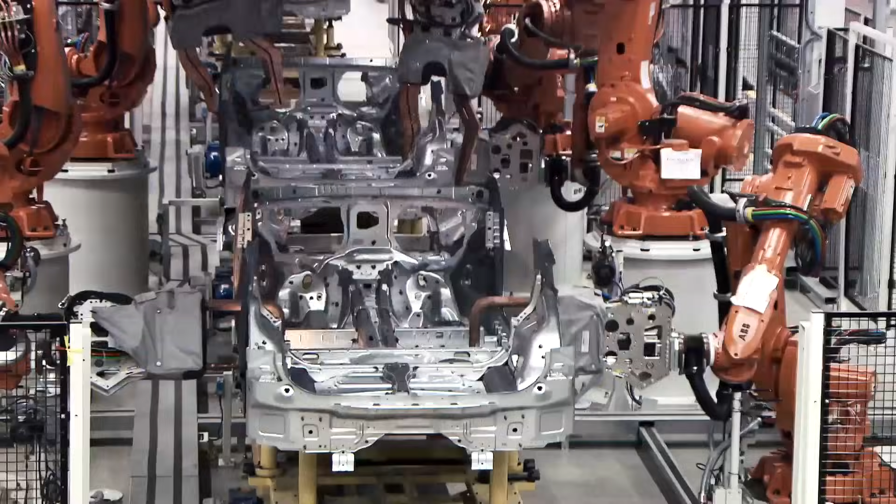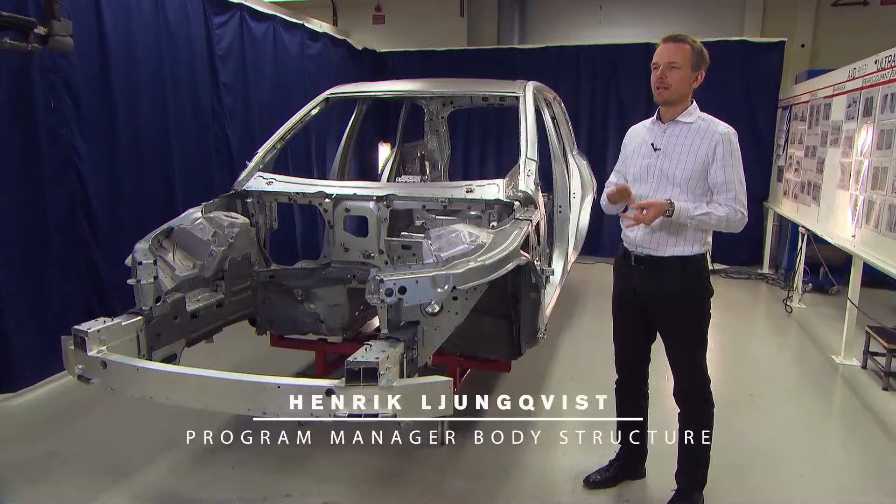This car body is developed to meet all requirements around the world. It's a worldwide car body, which means that it meets all legal requirements, all rating requirements and all internal requirements we have for safety.

To fulfill these requirements, we have divided the structure into two main parts. One is a deformable part of the structure, and then we have the safety cage, the backup structure of the car.

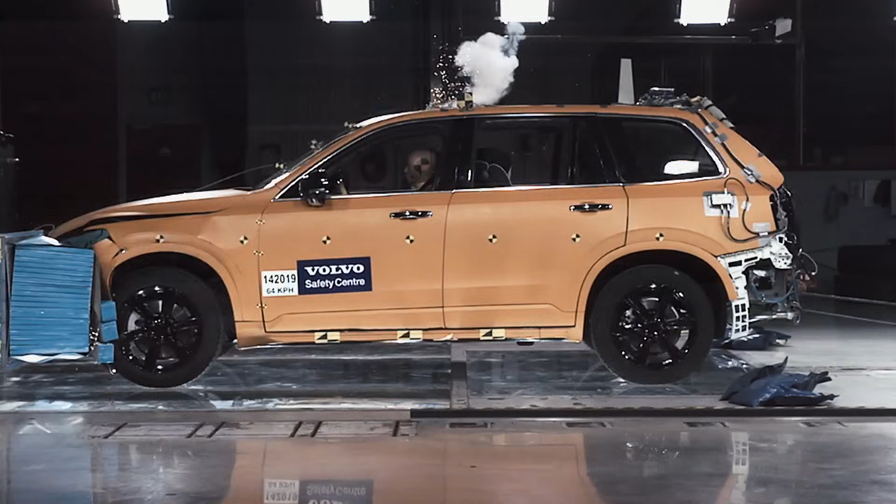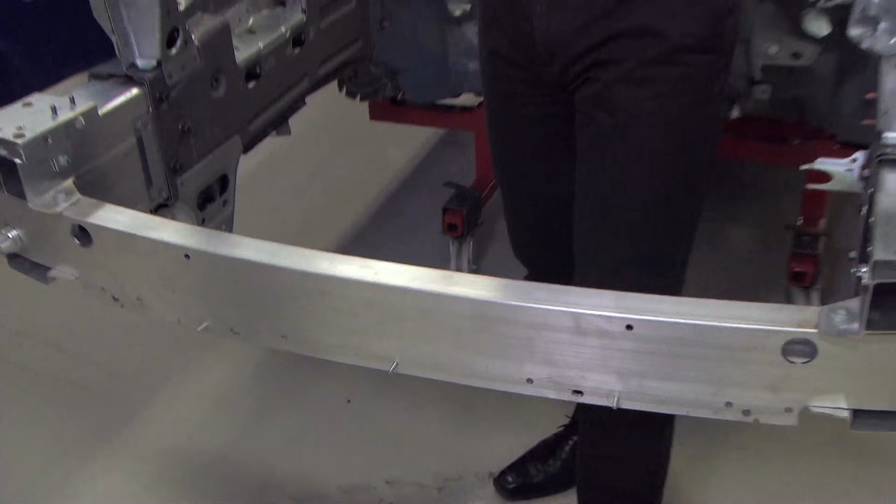First we have the bumper beam, which is this component in aluminum, and we have a wide bumper beam with a high section for spreading the forces during the crash event. After the bumper beam we have the crash box. And during the crash event, we have an actual crash of the crash box. After that sequence, we go into the side member itself. And then we have predefined bend lines in the side member, so we bend it like this.

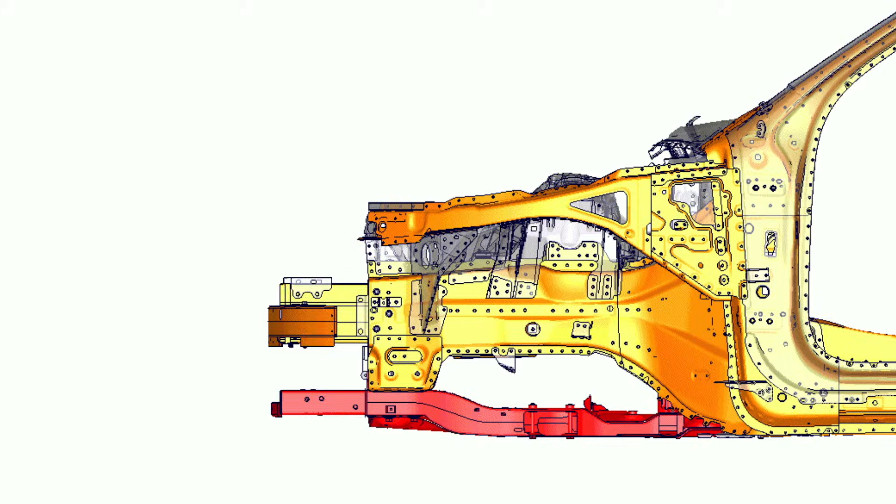During that bending of the side member, we drop the force and we drop the pulse and the deceleration for the occupants, which is so important to secure that we have not too high forces from the restraint system to the occupants. In parallel with this system, we have the upper side member you can see here. And that member will bend inboard during the crash event.

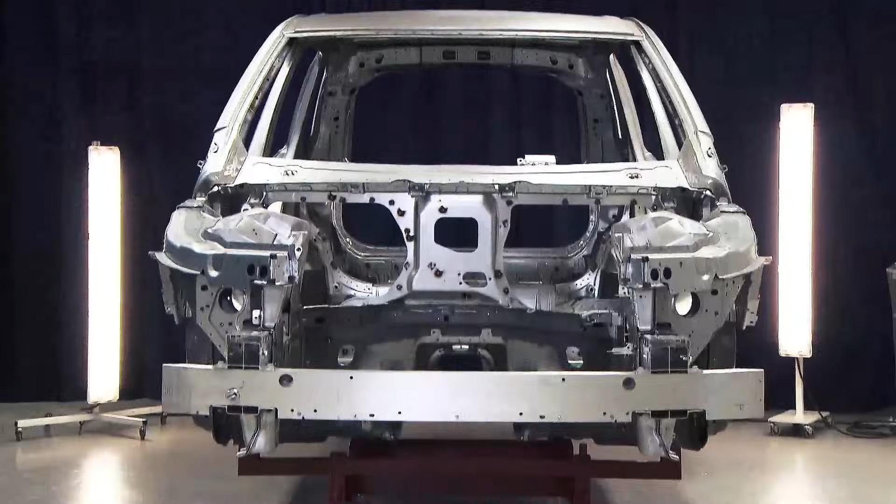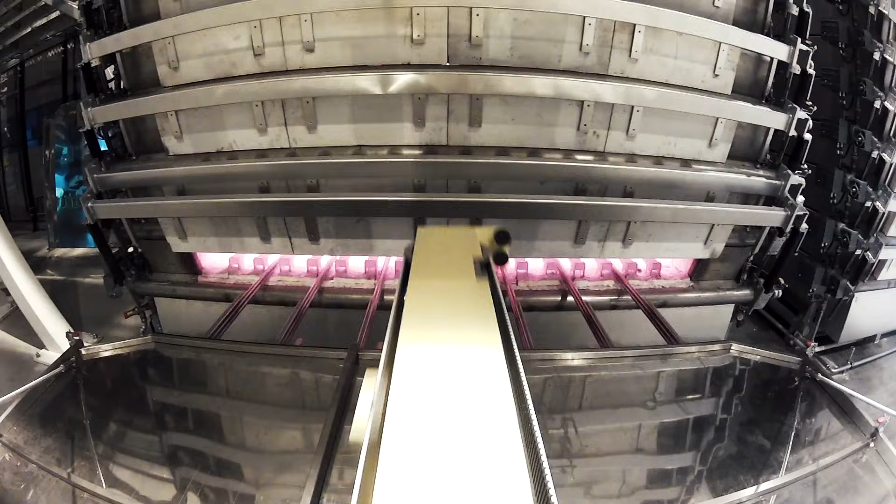Now you can see here in the safety cage that we have some parts that have a different color. They are dark gray or black. The components we have here in the safety cage are hot form steel, which means that they are produced from sheet blanks that we heat up to approximately 900 degrees before we stamp them. And then we stamp and form the part at the same time when we cool the part. By doing this, we can achieve what we call boron steel.

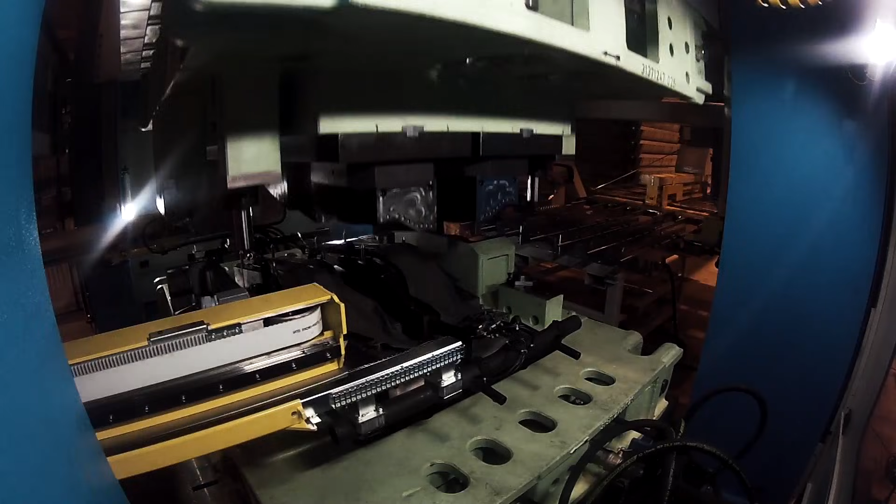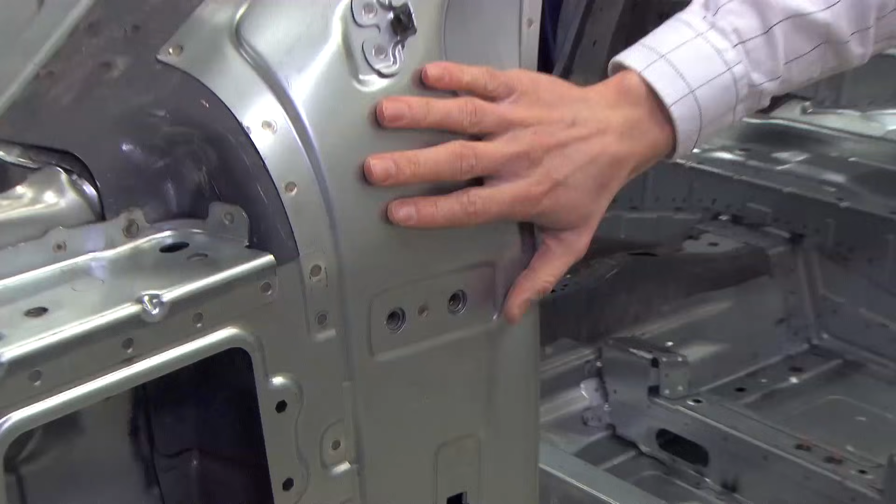And we have no competitors around the world that have more boron steel or hot form steel than we have. In this generation of the XC90, we have one component in boron steel, 2.5 meters from this point all the way to this point, to secure that we have no weak point along the way in the A-pillar and the cantrail. And this is very important for rollover impact and also for side impact, when we have a lot of forces from the B-pillar and a lot of forces from the roof.

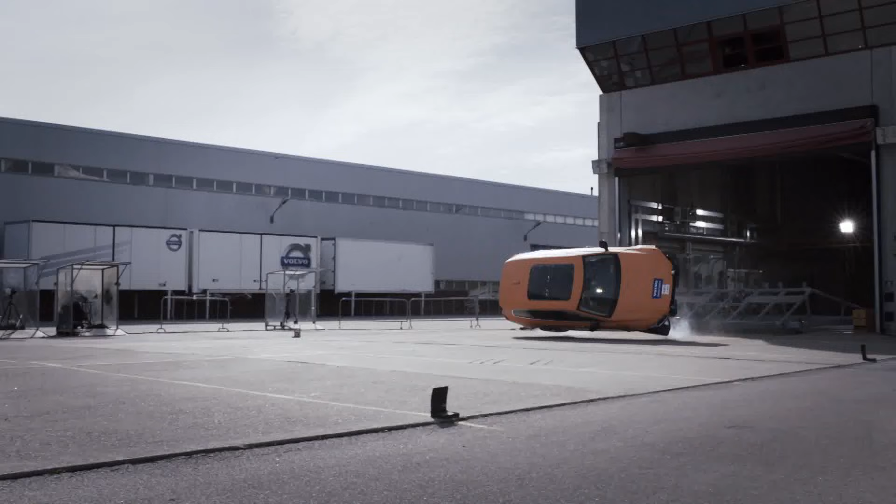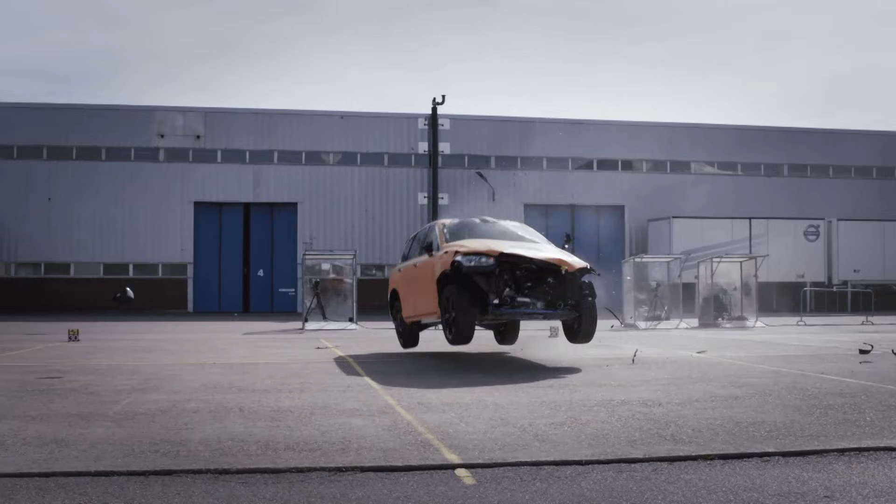The main component in the side impact is the B-pillar. And the main challenge compared to the frontal crash is that we don't have so much deformation distance. The occupants are close to the B-pillar and very close to the other car in an impact situation. So that means that we need to have an extremely strong B-pillar. We have different thicknesses for each position in the B-pillar, which means that we can have a pendulum type of behavior of the B-pillar during the side impact.

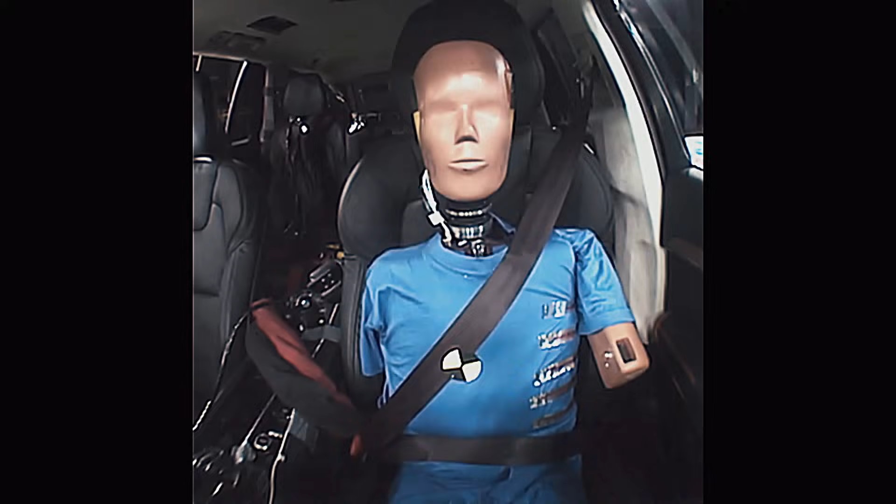The high forces from the B-pillars are then spread into the roof structure and the cantrail and down to the sill structure. Then the forces from the side structure are spread to the other side with the seat cross members we have here and the roof cross members that we have. So that means that in the same principle as for frontal crash, the forces are spread around the occupants.

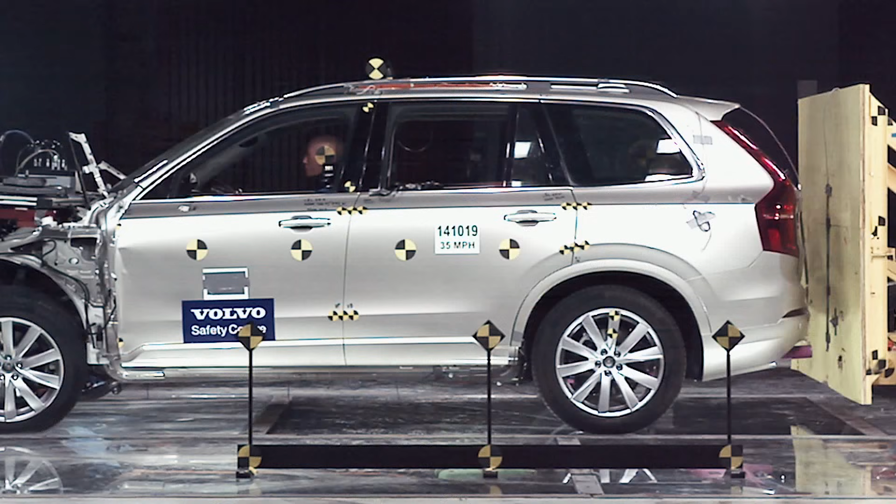Here we have the rear structure of the car, which is so important for rear crash performance. And the main challenge for this XC90 is to secure that we have equal safety level for the third row occupants. We have occupants in this position of the car. The basic principle is similar to frontal crash, which means that we have a wide aluminum bumper beam with high section for spreading the forces.

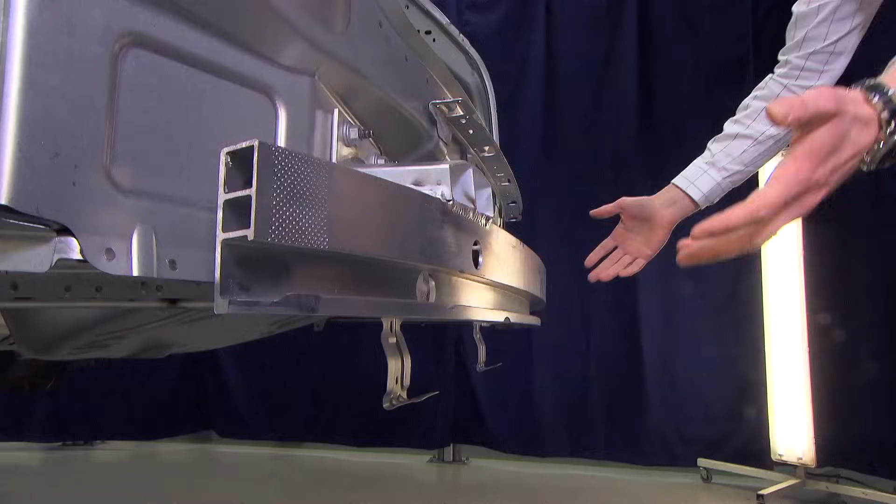And here we have the crash box, similar concept that we have in the front with axial crush in the crash box during the impact. And then we go into the side member where we have bending and crushing mode of the side member in a high strength steel material. And after that we reach the boron steel. And when we reach the boron steel, we reach the safety cage and then the crash is over.

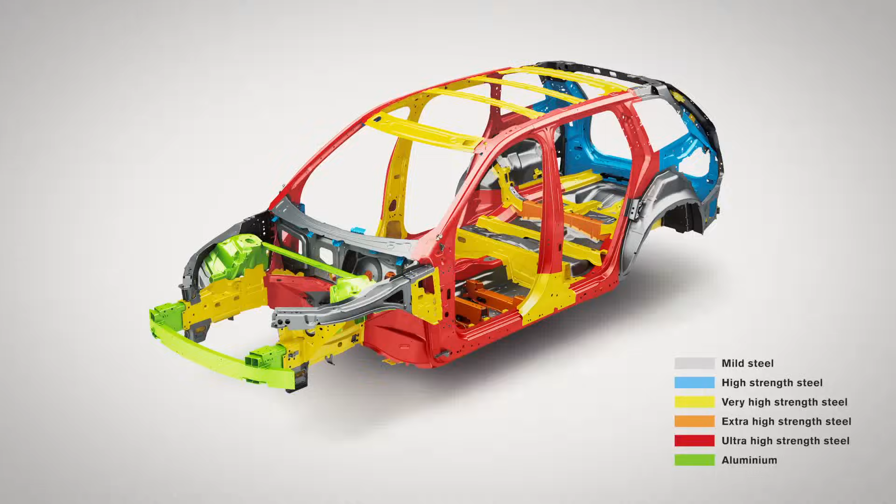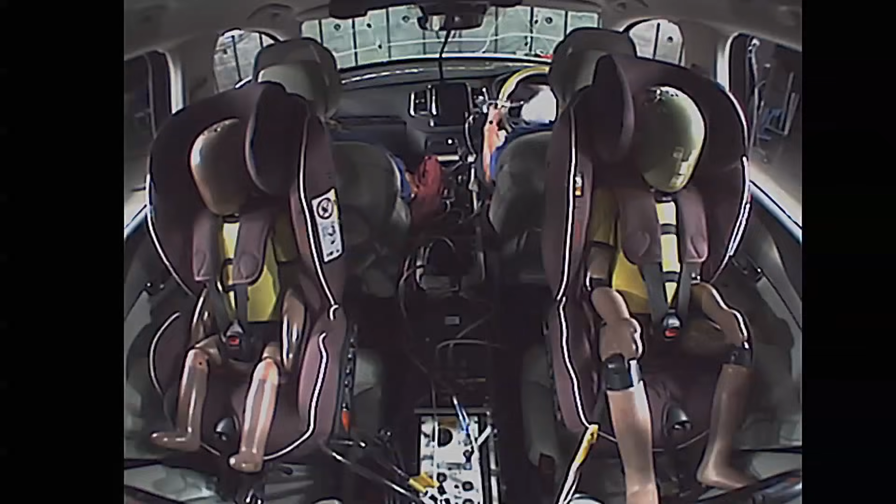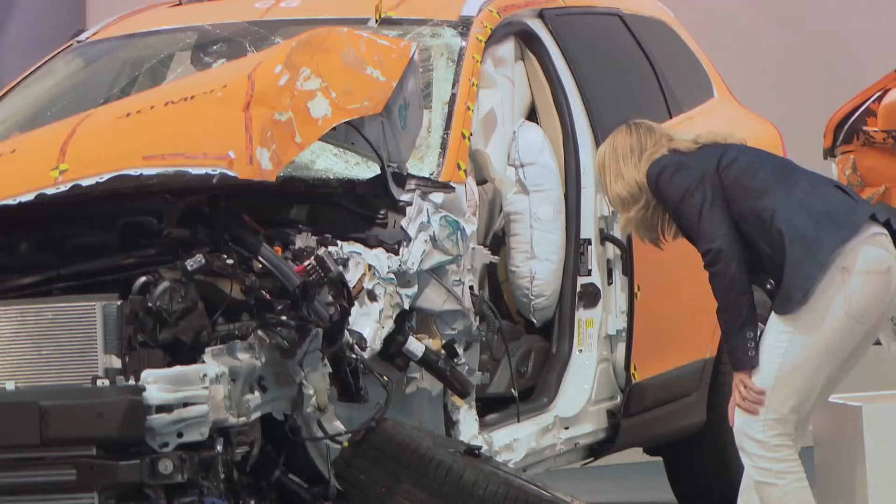The all-new Volvo XC90 is designed to be one of the safest cars in the world, designed around people and real-life traffic situations. The safety in the all-new XC90 is a concrete example of the progress we're making in safety development towards our aim that in 2020 nobody should be killed or injured in a new Volvo car. Lotta Jakobsson, who has 25 years of experience in car safety research and development at Volvo Cars, is proud the new model contains 2 world firsts.

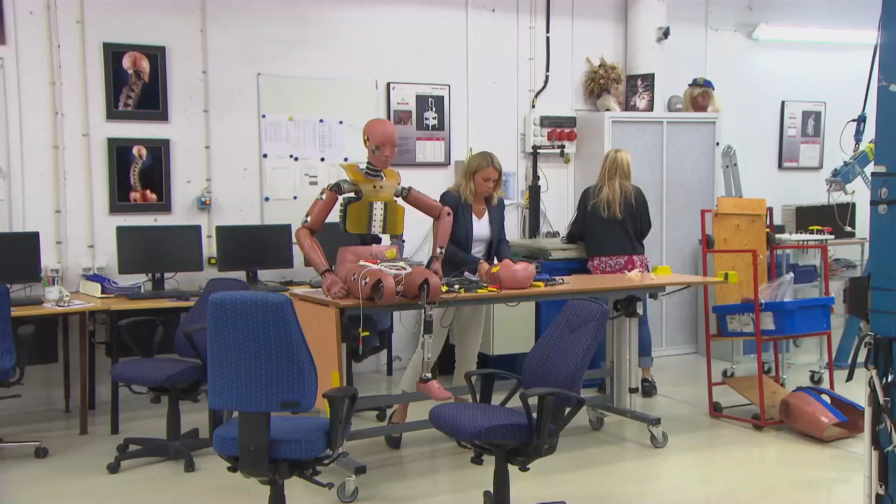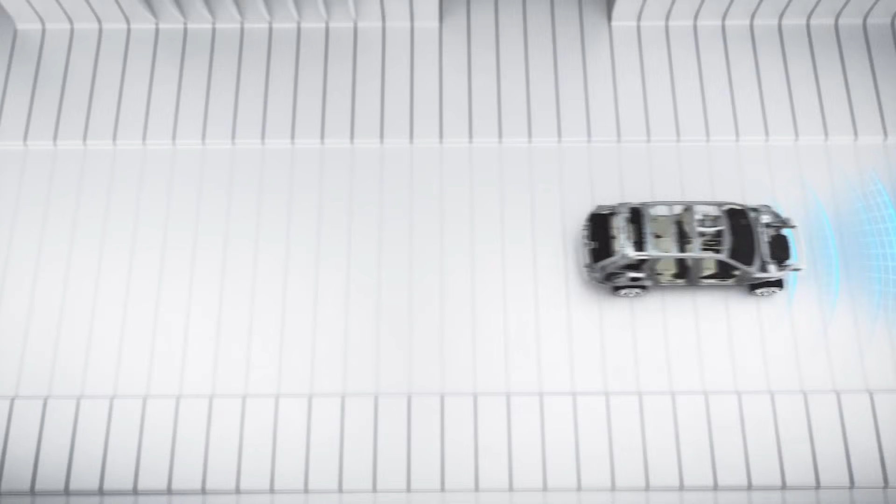One of the world firsts for this new XC90 is that we add a functionality to our City Safety, our forward collision warning and auto brake functionality. We add a braking functionality when the car is turning and there is an approaching car. City Safety is the standard package in the XC90. It includes our warning and auto brake functionalities addressing vehicles in front of you, pedestrians in front of you, as well as cyclists in front of you, both in day and night.

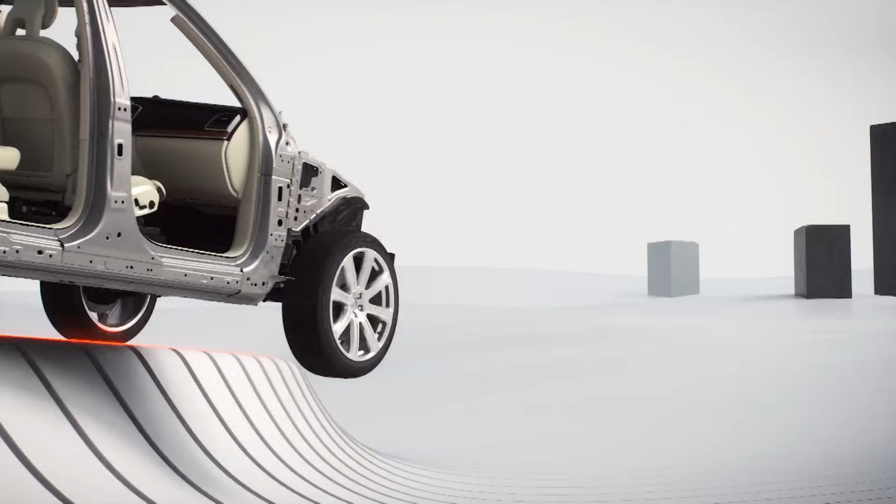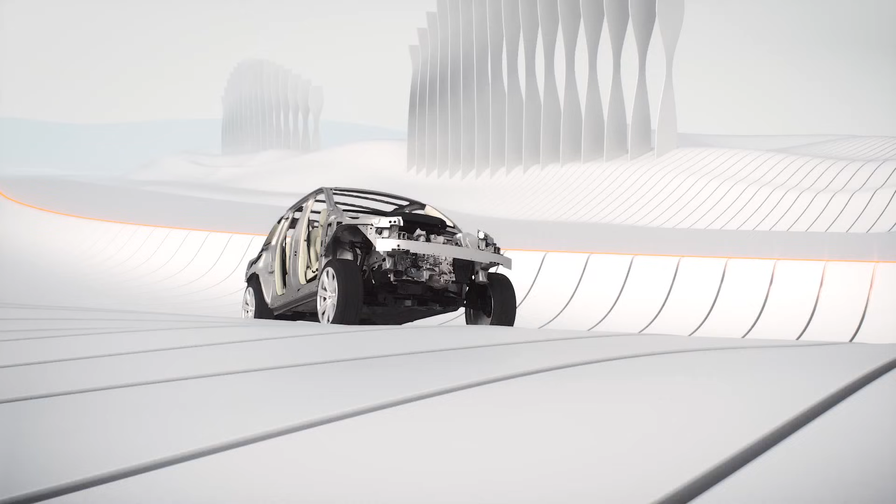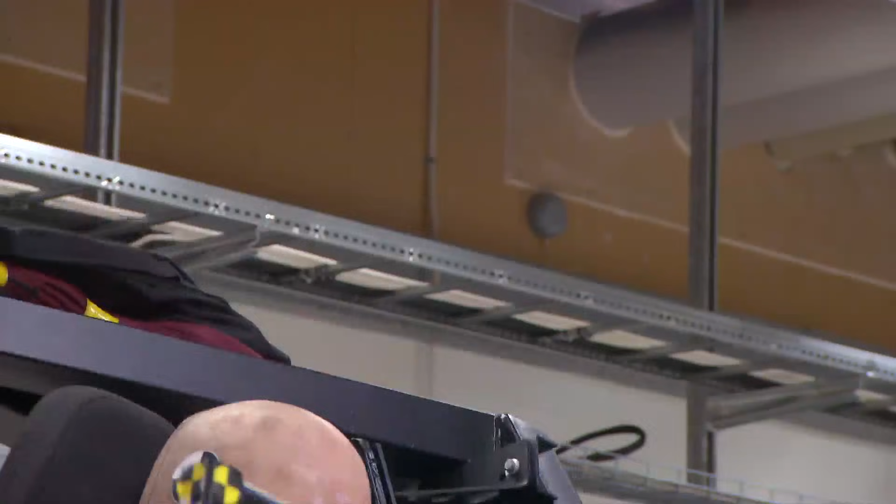Another world first that we have is a functionality in a run-off-road situation. When the car lands on the wheels, there will be a vertical force into the occupant. So we have put the functionality in a seat that absorbs that energy and reduces the likelihood of spinal injuries. This is an extremely important issue. Looking into the statistics, more than half of those being killed in road crashes in the US are off-road crashes. Run-off-road crashes are very complex, both in how they occur and also what happens during the crash.

And we have systems in the car to help the driver to stay on the road. Driver Alert Control monitors the driver being alert, and Lane Keeping Aid assists the driver to stay in the lane. We also have systems covering if somebody's impacting you from the rear. The sensors monitor behind the car, and if there is an impending accident, the lights go on with a more rapid speed, and the occupants are tightened into the seat. It's important to protect all occupants in the car. So of course we have pre-tensioners in all seats in the car, even the third row.

The new model is stronger in every sense too. The car body has more high-strength steel than ever before. More than 40% of the weight of the car body is boron steel. And boron steel is a very strong steel. It's also low weight. So this is a way of adding safety without adding weight.